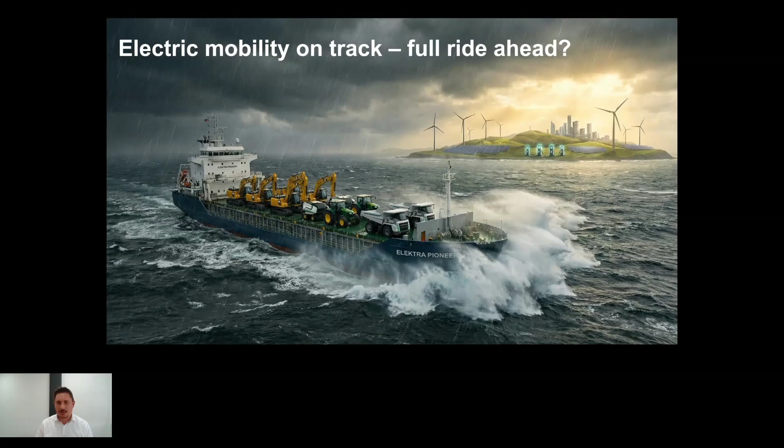So I think today we are already, and this is not only hope, I'm an optimistic guy, and pretty sure many will share that view, climbing the slope of enlightenment towards the so-called plateau of productivity, where it is not about electrifying everything for its own sake, but really doing that for hard reasons like total cost of ownership, like productivity of electric machines.

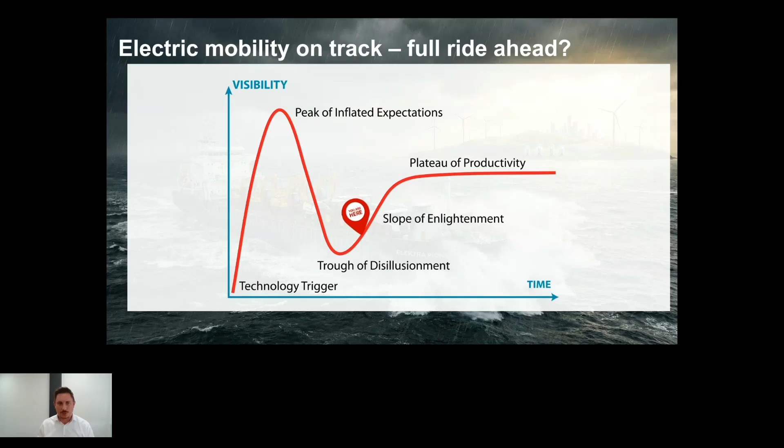And we're going to see throughout the presentation that there are use cases that actually cover these topics. So the question is, why did we need to go through that trough of disillusionment? And I have six quite simple answers just to make the ground for the further discussion. The first one is, of course, systems complexity.

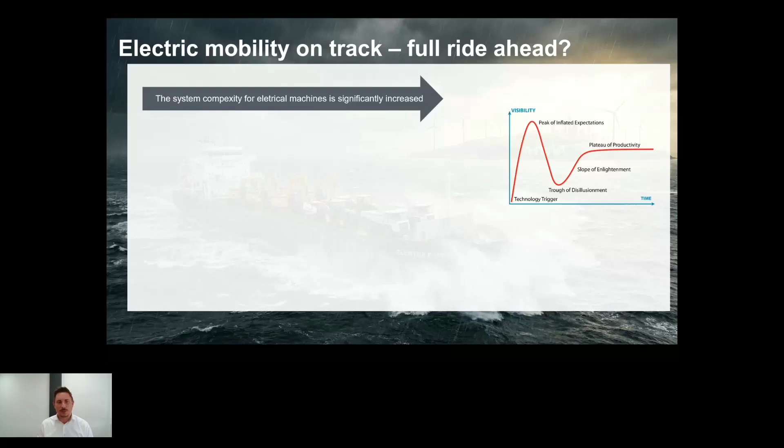The system complexity for electrical machines is increased, both compared to conventional machines, but also compared, for example, to electrical passenger cars. So there is more complexity in electrifying an excavator, a wheel loader, a tractor, than in having a conventional vehicle. Then, of course, we're talking about quantities. The quantities are way smaller than we have today in other segments. And this also goes along with cost, of course. It's all about economy of scales in the end.

If there are not that many quantities and the components are a bit more expensive or still way more expensive, then it all adds up with complexity and more expensive machines. So when we're talking today's projects, we often talk about cost parity as a target for the next generation of development of electrical machines. But when you look into electrical machines that are in the market today, you still often have factors of 1 point something to even up to 3 times the cost of a conventional machine.

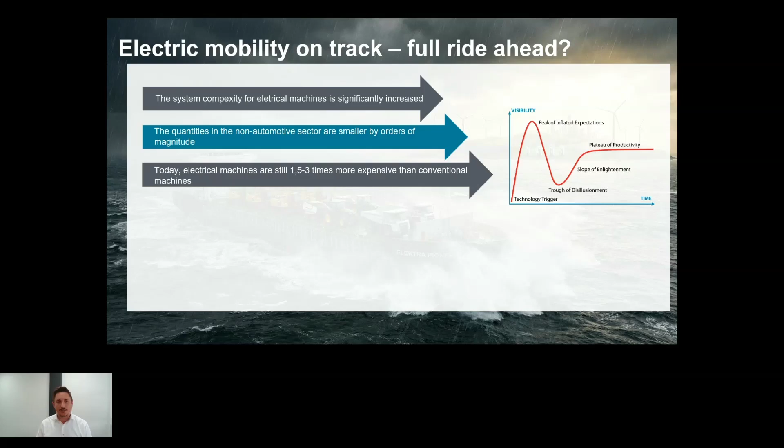This, of course, is not a long-term stable way, and we have to find out how to accelerate the economy of scales in order to get out of that dilemma of low quantity, high cost solutions. Then, of course, electrification in off-highway is not about emotion or being green. Typically, off-highway machines are bought because they are production machines. So it's about productivity, total cost of ownership, and there has to be a business case behind.

And of course, one solution to solving that dilemma would be a starting help with incentives and funding opportunities. This is just simply not there, and it hasn't really been around in most parts of the world over the last 2 or 3 years. And last but not least, nobody wants to hear that argument about the passenger cars, that the infrastructure is not working. I think many of you are driving electric cars and will agree that electric charging works perfectly for passenger cars, but the situation is a bit more complex, of course, when it comes to electric vehicles. But nevertheless, these are reasons why we have gone through that trough of disillusionment.

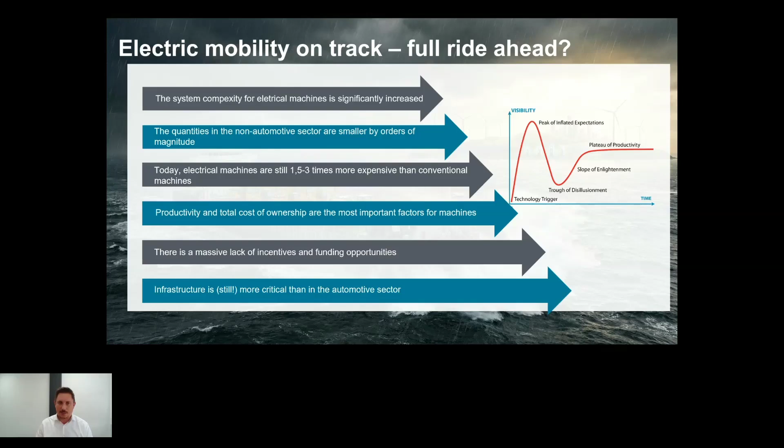But I said I'm an optimistic guy, and I have some good news, and I think many will share that the electrification is coming. When you see these kinds of applications, like really, really large machines being electrified, mostly for total cost of ownership reasons, partly, of course, also because of ESG targets, there are big deals, a lot of money in electrifying these machines. So there is no real physical barrier in doing so. It's just a matter of the business case. And if the big ones are getting electrified, then everything can be electrified.

But of course, it's not as easy going as I indicate here, there are some challenges to that. And of course, part of the challenge is speed and it is cost, especially from a European perspective. I think we all agree that we need to be faster and we need to be more cost efficient in the long run to really be able to develop stable electric machine portfolios.

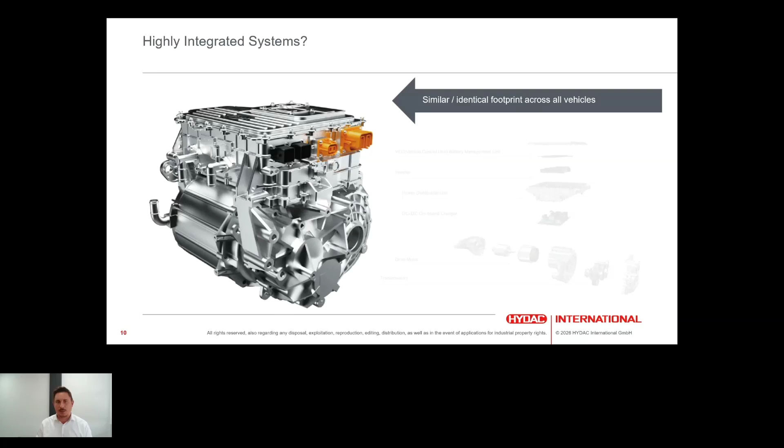So why not just do the same for the off-highway segment? Well, there are some reasons why this works fairly well. The first one is most of the passenger cars have a quite similar footprint or space claim for these kinds of components. So from outside, of course, they look different, they differentiate, but under the hood, there are very similar architectures, and they all share the same goal. They want to optimize their consumption according to the WLTP cycle.

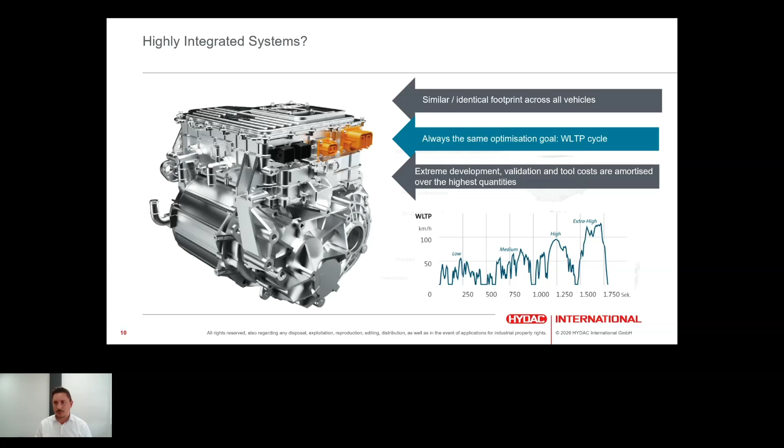So this is quite a clear optimization goal, and this allows for a lot of effort put into engineering development, validation, and of course there are also tool costs related to such high integration. So this must somehow bring a return on investment, and this is usually done via quantities. Now let's have a look at our market. Typical fields of application in the off-highway market: starting with pleasure boats and work boats on the one hand, going via agricultural machines, construction machines, special machines like GSE machines, but also sometimes semi-stationary machines and things like that.

And all of these applications, of course, have different mission profiles. They have different space requirements, different environmental requirements, different power requirements, and in the end, none of these applications alone have really high quantities. So that highly integrated, high quantity solution might not really work, especially in an industry that is well used to having highly customized powertrain systems, as everybody who has been working in hydraulics knows pretty well. There is a lot of customization in these kinds of applications. So, of course, skipping customization would be part of the solution, but maybe there is also a better solution. And one answer to that might be modularity.

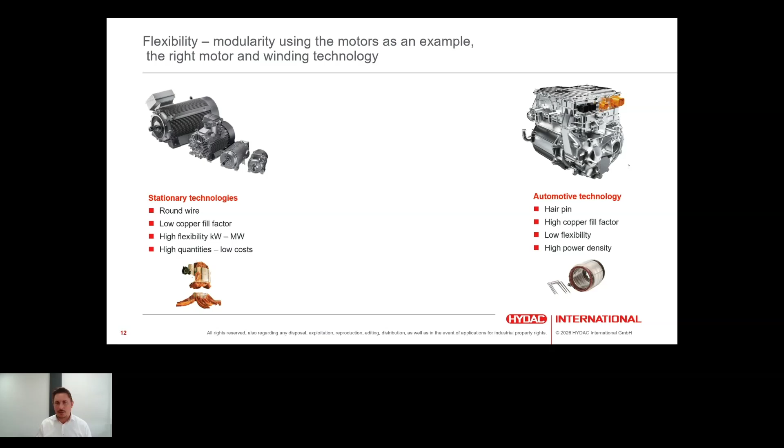And also this can be produced in high quantities at a reasonable cost, actually. But as we all know, mobile application is something where power density, torque density is quite important. So what we are trying to do, and I think most of our competitors and everybody in the mobile world also is trying to sit somewhere in between, combine the best of both worlds, and try to find high power density motors based on flexible technologies. In this case, round wire technology, of course, as most of the guys do, and still achieve by special winding systems a high power density.

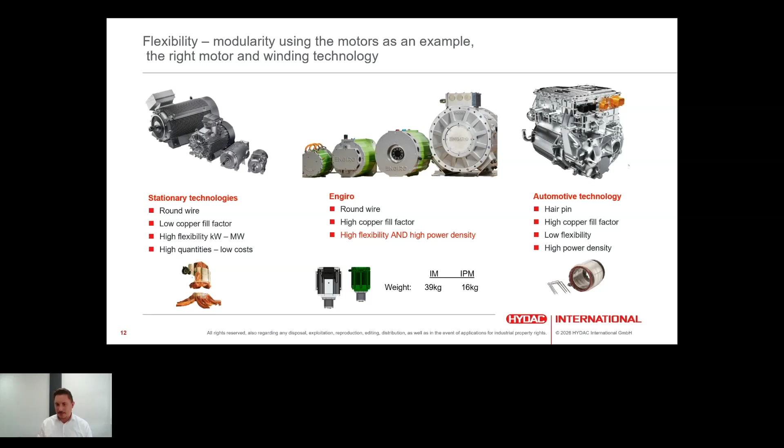And yes, power density is key. We cannot sacrifice all the flexibility to power density. And that's where modularity comes into play. Just to give an idea on how that works, typically modularity means you have some standardized technological core. This is the part that you don't want to vary from project to project, because there is a lot of effort put into that. There is tooling related to that. There is a lot of simulation, validation related to that.

So everybody coming out of the hydraulic space knows it, for example, as a pump, where you have the rotation group of the pump. For motors, it's quite similar. It's the rotor and the stator. Once developed, you do not want to change it from project to project. But application variance does not necessarily come from the electric core part of the motor, but rather from interfaces, from cooling, from having different set points in terms of voltage and speed. And this usually can be controlled by varying the length of the motor, varying the windings of the motor, varying the cooling jacket of the motor.

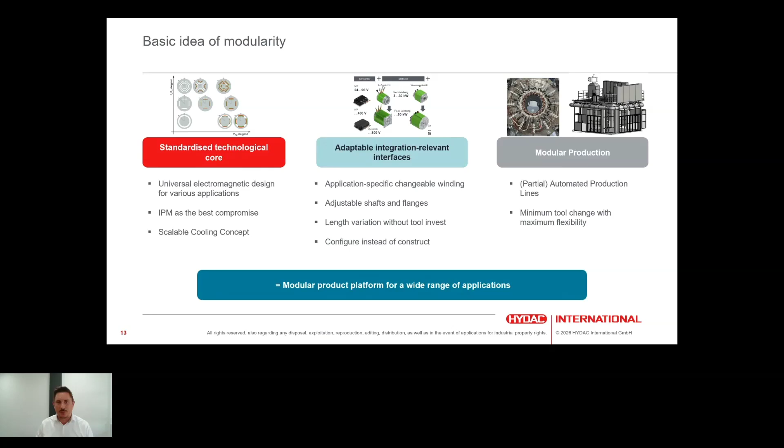So this is where modularity comes into play. And of course, in the end, you also need a production that supports that kind of modularity. But if you bring those things together, you end up with a very modular portfolio. I do not want to go into the details, as this is not a product presentation, just to give you an idea of what is possible with that kind of modularity.

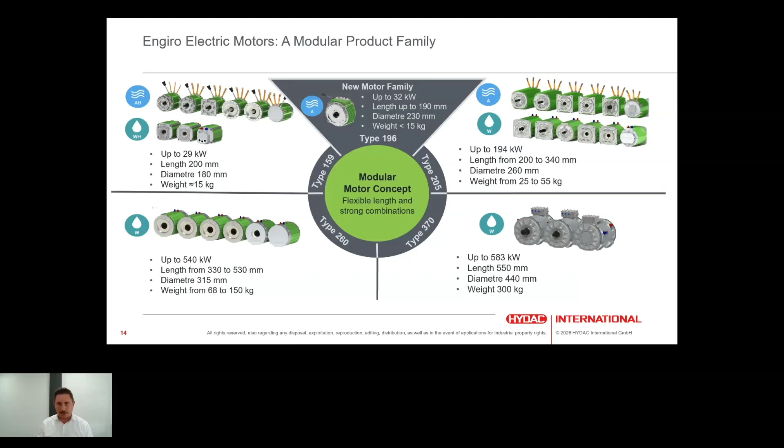So typically, out of 5 different frame sizes, 2 cooling principles, you can cover in every frame size 4 voltage classes. So, for example, let's take a 30 kilowatt motor, because it makes sense in every voltage class. You can have that in 48 volt, which is kind of a boundary case. You can have it in 96 volts. You can have it in 400 volt, in 800 volt. The same motor, same technological core once developed, but varied throughout different applications.

And of course, with a lot of projects come a lot of mechanical interfaces, which ends up with just having a small variance in the core, but in the end, more than 160 different application-driven product types. So part numbers, whatever you want to call it, different types of motors in the game. And of course, this is only motors. You can do that for every other component that you find in the electrification space or in the off-highway space in general.

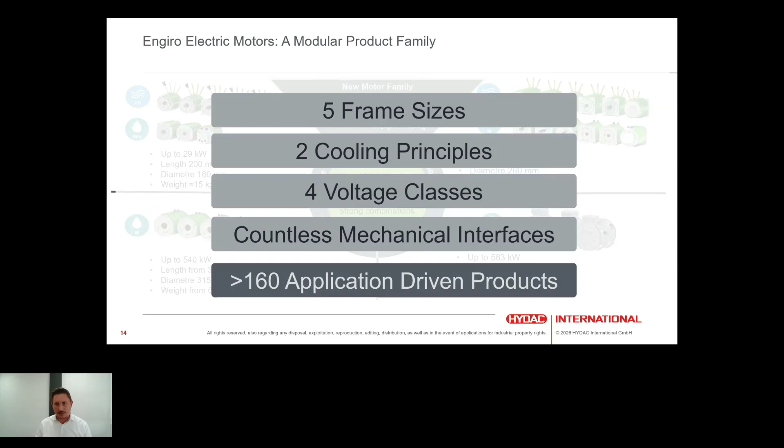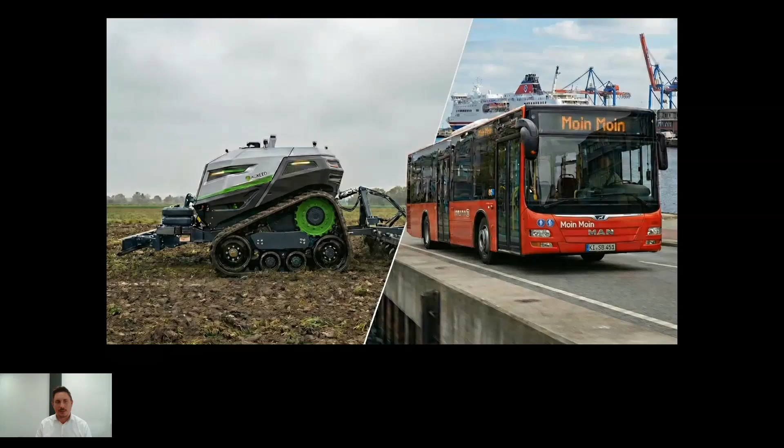And why does modularity help? Not only on complexity, but also on being fast. I will give you an example of that with the next slide. So these are 2 applications that are as different as they can be, probably. One, a clear off-highway application. On the left-hand side, this is a so-called AgBot. This is an autonomous farm robot, tractor size, so roughly in the 200 kilowatt class. And this is all about autonomy and productivity.

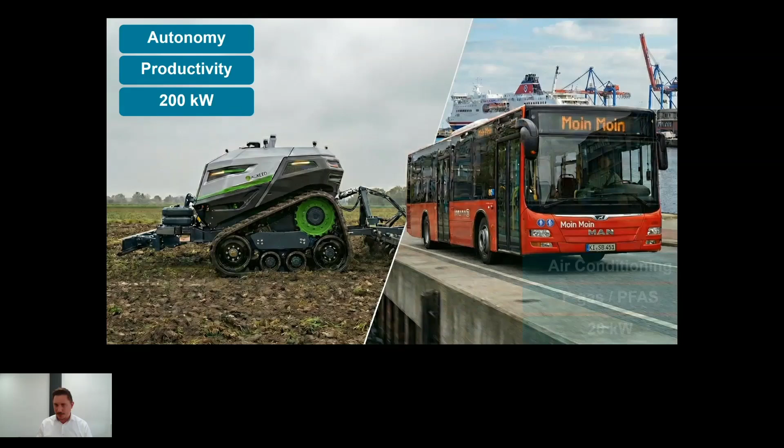So this is a diesel electric vehicle. It's not about zero emission, but it is about, as I said, autonomy and productivity, where electrification really helps. I do not want to dig into that in detail, just to show what this machine stands for. Well, and on the right-hand side, this is just a simple bus at first sight, but the bus comes with, let's say, a new problem to solve, because there are some new regulations upcoming in the EU.

It's not that easy to use the bus air conditioning anymore, because with that new regulation, you often don't find the right AC systems in conventional applications. So what you can do, and this has been our solution to that, is to replace the conventional compressor by a high voltage generator, generate a high voltage system for a conventional diesel bus, and by doing so, supply a high voltage propane air conditioning system.

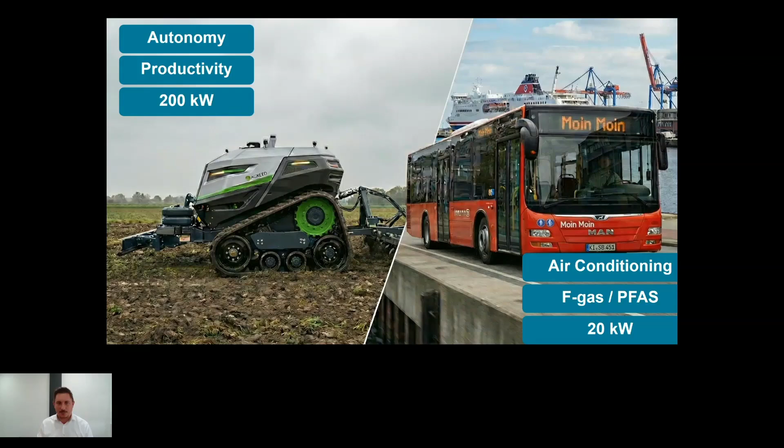So this is a retrofit option to get along with that new regulation. And this is done by using a diesel electric system. And this is the similarity actually of the two applications, because both of them are diesel electric, and both of them come with very special challenges.

Diesel electric without a battery. Without a battery means that you have, from a control theory point of view, a very stiff DC link. And that means you need, on the one hand, high dynamic voltage control from a generator point of view, but you also need to stabilize the DC link, because if you do not do so, with every load change, the inverter will probably see an over voltage or an under voltage error, and the system just stops.

This is the contrary of productivity on the left-hand side, but also when you think about an air condition. And for those who know Deutsche Bahn, this is a Deutsche Bahn bus. Deutsche Bahn has been very famous on their trains for non-working air conditions. Of course, we want to avoid this. So this means you need to have that DC link stabilization and good voltage control.

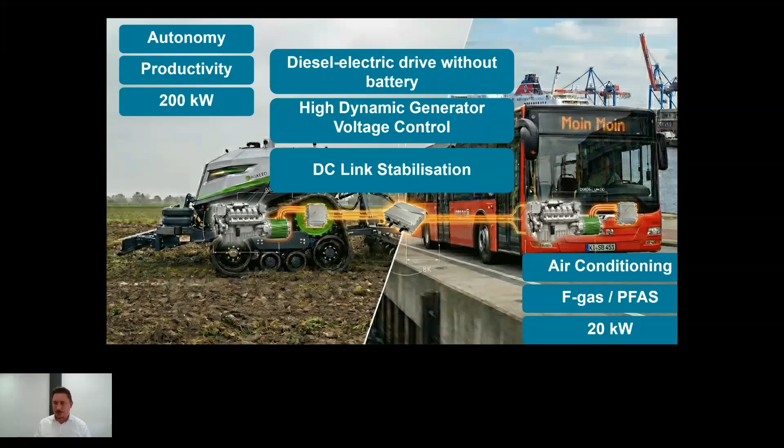And once you have application experience in modular products on the left-hand side, you can just do a carryover to the right-hand side and be fast in projects. This is the baseline of what I wanted to share with that example. So what does such a system typically look like in reality? It's not as compact as you have seen it on the machine, because here it is a lab example.

Let me explain the architecture. So you see here, in the end, an electric system for driving a rotating shaft. So quite a simple system, but there are some things you need to do for that. The rotating shaft is, of course, part of the motor. You need an inverter to do that. You have a battery in this case. Everything is high voltage, so it's liquid cooled.

You have a power distribution unit with all the fuses and contactors. You have an onboard charger charging the battery, and you have some HMI and some machine control ECU. And the reason why this is mounted on such a wooden table, I will show in a second.

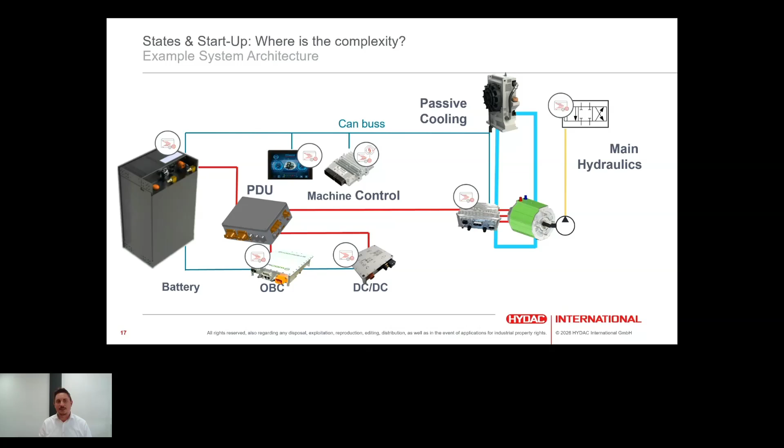So I've been talking about being fast, and I've been talking about one problem being complexity when it comes fast. So this should be quite a simple system, right? Looking at the system's architecture, this block diagram looks quite manageable. But this is a part that is often underestimated, because especially when something like that is done for the very first time, every major component in the system has its own so-called states.

So it's not just simple on-off, battery on, battery off, but there are some software-based states for the battery, like at least drive and charge. But everybody who is working in development of such systems knows that there are some more states. And the same is, of course, true for the onboard charger. And you see it's not the same states as the battery states. And the same is true for the inverter, and even the DC-DC converter has different states.

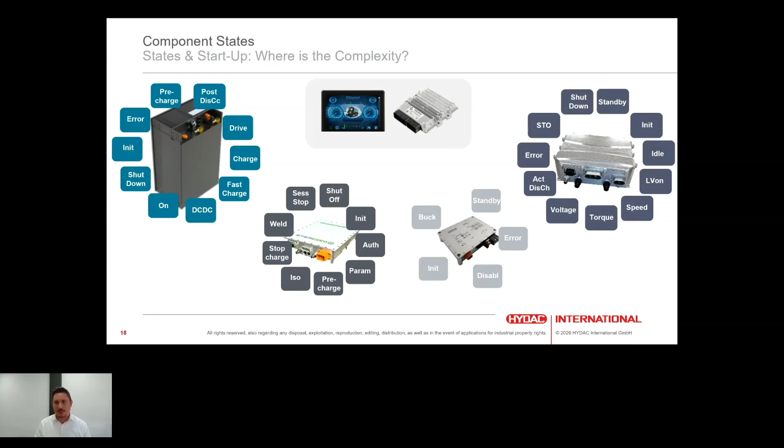And of course, the states are not standardized. There are some approaches to standardization, but let's be honest, nobody is really implementing standards 100% in every detail. So there is always something that is non-standard. And if you look into the components, these states are, of course, all interconnected to each other.

So there is a so-called state machine with transition conditions, and the component is moving from one state to another state when it gets the right message, in most of the cases it's CAN, at the right time to switch transition. And you see that even for a simple thing like an inverter, there is quite a number of states, and just remember all the other components.

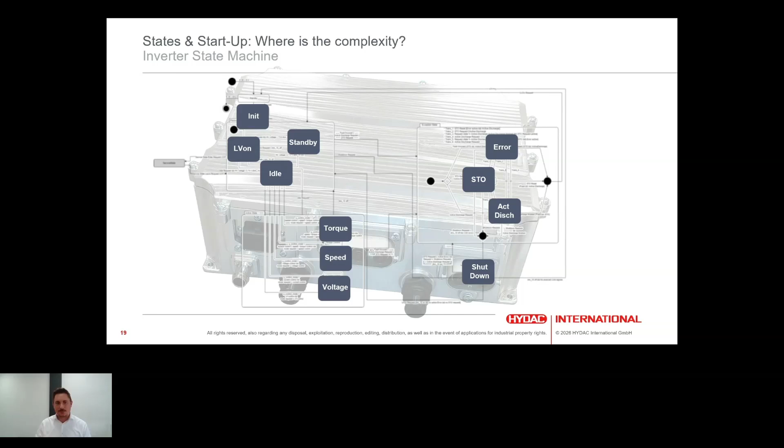Number of states, non-standardized, everything needs to be triggered at the right time to work with each other. And if it's not triggered at the right time, then there is an error state. An error state means the machine is not moving. Non-availability, this is the contrary of productivity. This is the contrary of good user experience. So there is a lot of potential for doing things wrong in this place.

And of course, also on machine level, there are kind of states or sequences that you have to go through. Just to give a simple example: this is, let's call it, a boot sequence from starting the key switch over to working. Working is just number 9 in all that sequence. And then there are again 6 different states for shutting down the system.

So this is not just a mechanical connection and a belt bringing everything together, and you activate the key switch, ignition is starting, and everything is done. More or less, let's say mechanically or highly integrated, but you have to really synchronize these states.

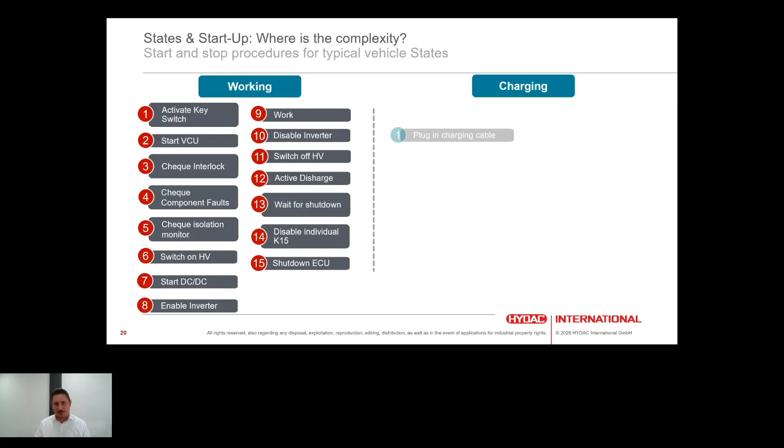When it comes to charging, just think of charging a conventional vehicle. Let's maybe do some oversimplification: just plugging a receptacle into that vehicle and refueling. In this case, it's even more of a sequence. And everybody who has been working in developing electric vehicles knows that charging, compatibility between different systems, between different chargers, batteries, off-board chargers, and so on, is often a pain point in development.

Of course, we managed to get that robust, but there is effort related to that. This is what this is all about. There is always effort related, a lot of effort, more effort than with a conventional vehicle. This brings in complexity, and this brings in cost, and that hinders being fast.

So just a brief example of how this looks when everything works. The sequence is going quite well. Interlock is checked, isolation monitoring is checked, battery is there. So now you're going through all the states we have seen on the architecture slide. Everything is up and running. In the end, the shaft is turning. As simple as that. It's just about the turning shaft. So a lot of effort, a lot of things that, of course, can be automated or standardized, but it's work that has to be done.

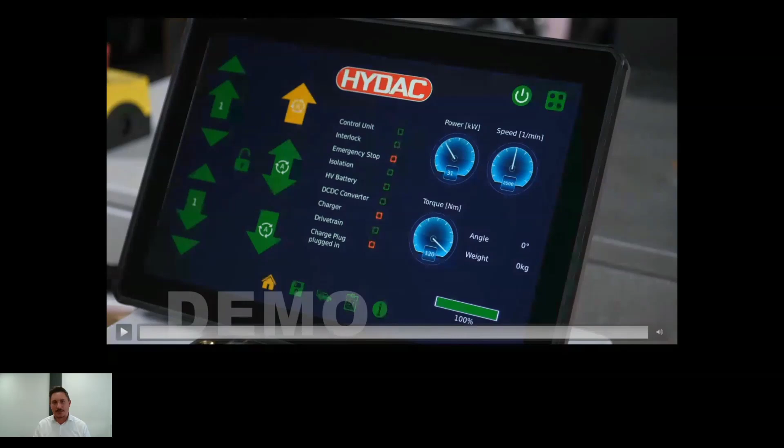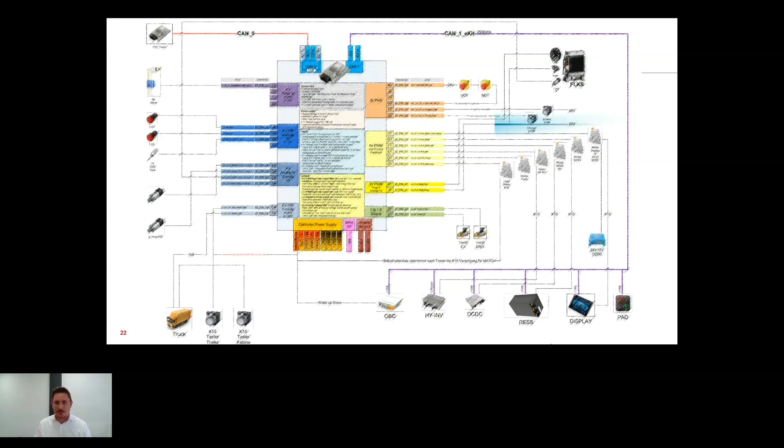And again, just to get some point to that, I do not want to go into the detail of the single wire diagram, but some of the secret sauce, a very pragmatic way of controlling those kinds of boot sequences, startup sequences, is, for example, shown here. You have the high voltage components on the lower right part of that diagram, and you see there is a bunch of relays here, and we just use the relays to have some dedicated K15 control, which means we can more or less in hardware, just like mechanically, control the startup sequences of these components. This brings in some robustness, and this brings in real control over the system.

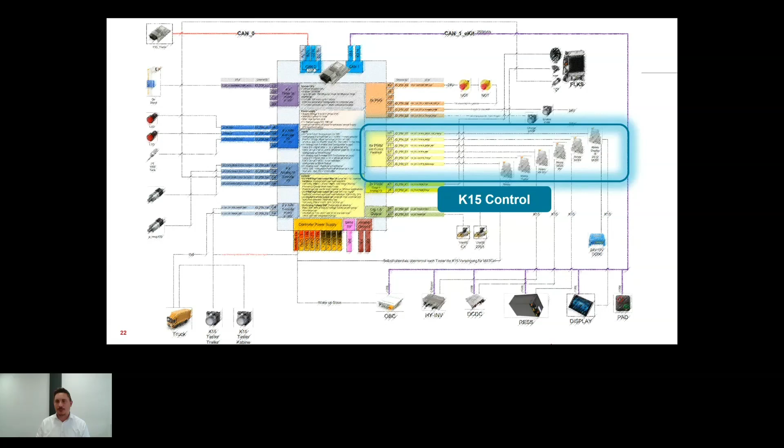And just to give an idea of the system, because this also is quite an interesting application with a quite interesting use case. In this case, again, we're talking about a kind of diesel electric system, but it's kind of separated into a diesel-driven truck with an electric trailer. So the question is, why should we have an electric trailer? It's quite a simple thing. It just needs to move up and down and carry dirt around. So why should we invest in an electric system? Well, let me just give a rough sketch of the use case or the business case behind it.

Typically these trailers are long-life machines. They actually survive three trucks during their service life. And every truck that wants to operate such a hydraulic trailer needs to go through expensive post-production to have the right hydraulic system. So this is often not done inline, but something that is done post-production. So this is quite expensive. This gives just a very rough estimate, about 40,000 euro added cost per trailer lifetime when you talk about 3 trucks. So this gives you the ballpark of what you can do in improving something.

And improving something in this case means adding an electro-hydraulic system for several reasons, but one of the reasons, for example, is productivity. Because the lowering of the trailer works much faster if you do not rely on a single hydraulics line that comes from the truck, but you have a dedicated hydraulic system under your control. And lowering faster, because you can imagine if the bucket is empty, lowering is just gravity lowering, which is pretty slow. But if you can somehow speed that up, this is an increase in productivity.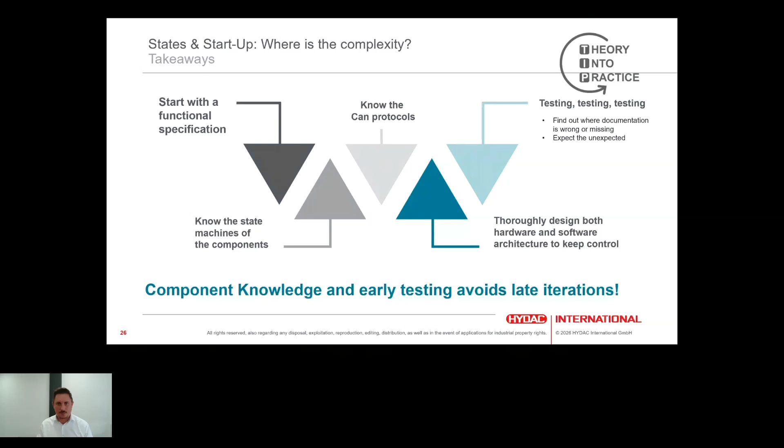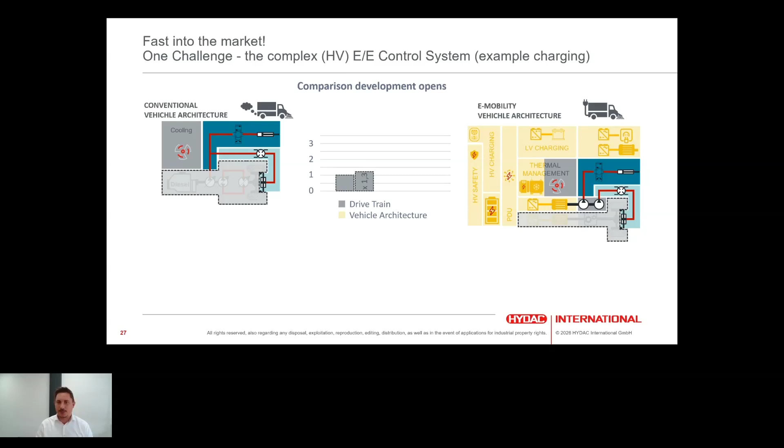that you have to put into creating a working, tested electric drivetrain. But just remember the picture with the diesel engine in the beginning, the high voltage or the electric architecture, which is also true for low voltage systems, is much more complex than the conventional diesel engine architecture. This typically results in an effort that is 3 to 4 times the integration effort you have for an electric machine compared to a conventional machine.

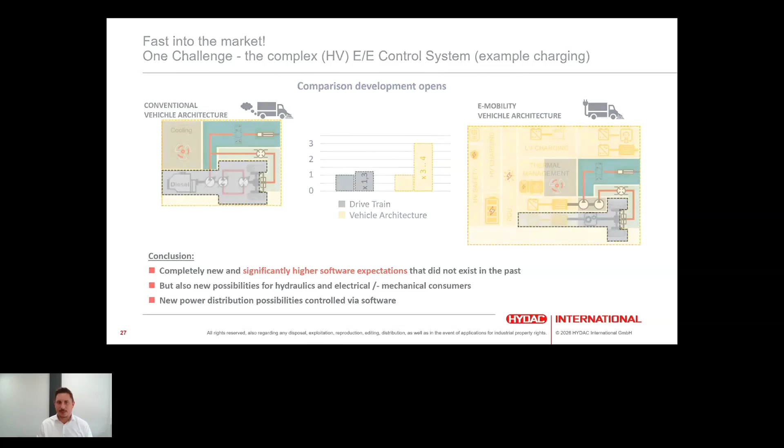So this brings us to the conclusion that we should start reusing stuff. We should not always start from scratch. And again, modularity could be one solution to that. This is what we are trying to do. We're trying to modularize software to decouple, for example, the communication and state machine based issues that are component bound from functional parts, like, for example, a ground drive or a thermal management system.

So the idea is to have different software layers with drivers, with functions, with overall vehicle management, and that you can really reuse those building blocks. In the best case, you can use the same charging software block that you have for a pleasure speedboat and for a wheel loader. This is then really reusability and modularity that helps us being fast and saving engineering costs.

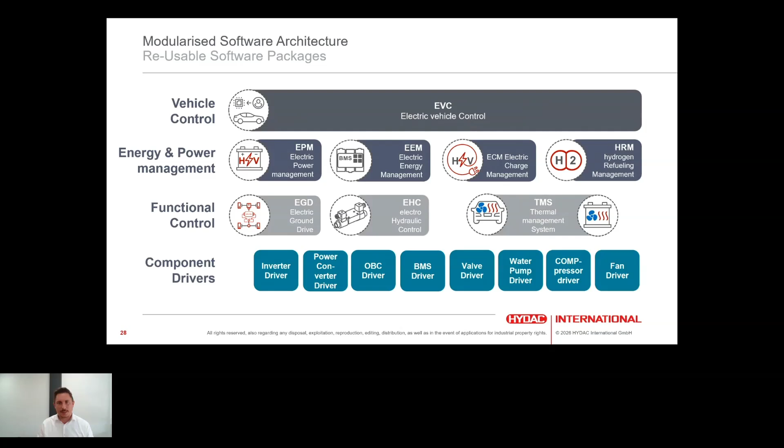But we've been talking about some struggles. It's not only about the protocols, but often there are some things not working in the first place. And most of them are not related to machine types. They are more or less related to the underlying systems architecture. The interesting thing is that when you look into, let's say, an oversimplified systems architecture for an electric system and compare those, many of those machines have quite similar systems architecture. So there are a lot of similarities. They share, so to say, the same architectural basis.

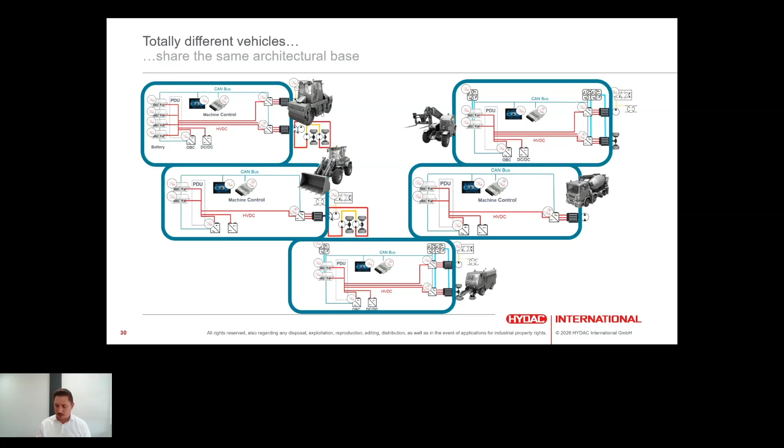When talking about battery electric, of course, it's always a battery, a charger, a DC-DC, a power distribution unit, a machine controller, an inverter, a motor, maybe more inverters, more motors. Sometimes it's one battery pack, sometimes it's 5 battery packs. It depends. But the underlying architecture is often quite similar. So this brings up the question, if we want to be fast, remember the picture in the beginning, complexity and speed, or cost and speed, isn't there a way through, of course, a well-designed system?

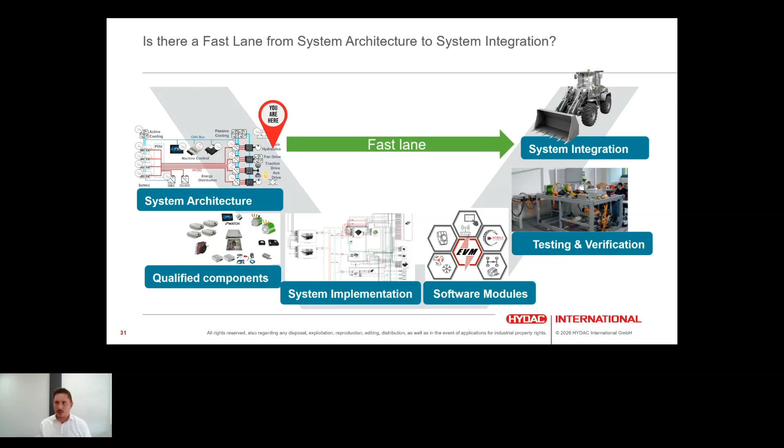Being fast cannot mean getting rid of or letting loose with quality design. So there are some stages you have to go through. You start on the left-hand side with your system design. Even if you have an idea, you have to go through implementation. And really important, as I said before, is verification, testing of the system. So the question is, isn't there something like a fast lane? And actually, I have mentioned the fast lane in the title of my presentation. Of course there is: when you have similar architectures, then reuse is again the keyword. So pre-validated systems that can be reused bring part of the fast lane.

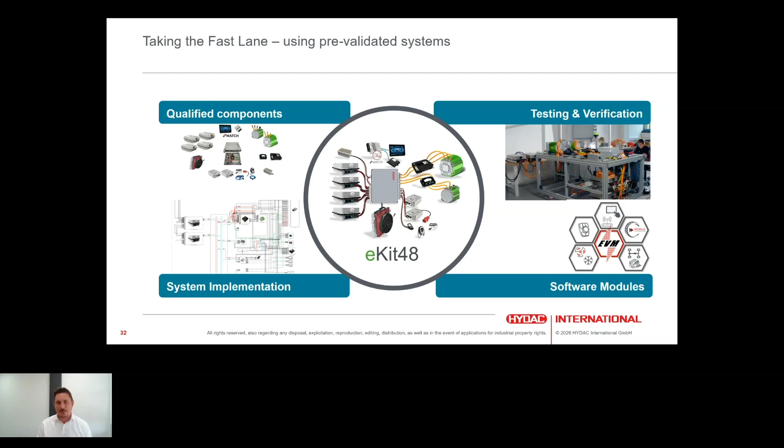So the idea is to have similar architectures with the same components that are tested working together, with the same software building blocks that are tested working together. Of course, this will never be a machine. This is always like an 80% solution, and you have to go the last 20% in a machine in application engineering. But it saves a significant amount of time in the development process if you just rely on a pre-validated architecture.

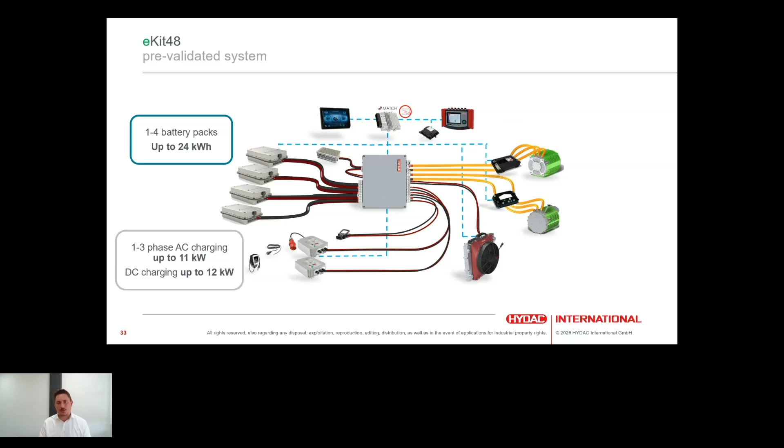And this is an example of such a system. This is, of course, again, modular, because we're not talking automotive. We always need some modularity. This is a 48-volt system. Therefore, we're talking about only up to 24 kilowatt hours. You have different charging options. Of course, you could have more, but this is what turns out to make sense in many applications in the market. You can have several kinds and numbers of electric drives.

And of course, what glues everything together in the end is the software, the ECU, the control system with integrated power management, error management. So all the things that need to be developed step by step when you start from scratch. This is the idea of a pre-validated system. And of course, a power distribution that from an electrical point of view brings everything together. And then there's some auxiliaries and so on.

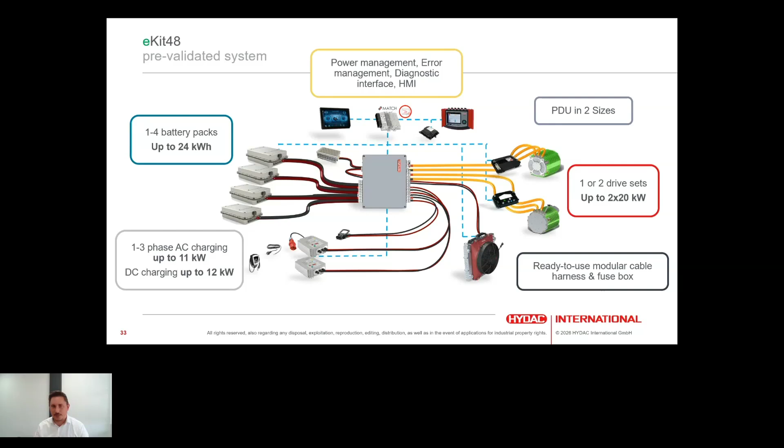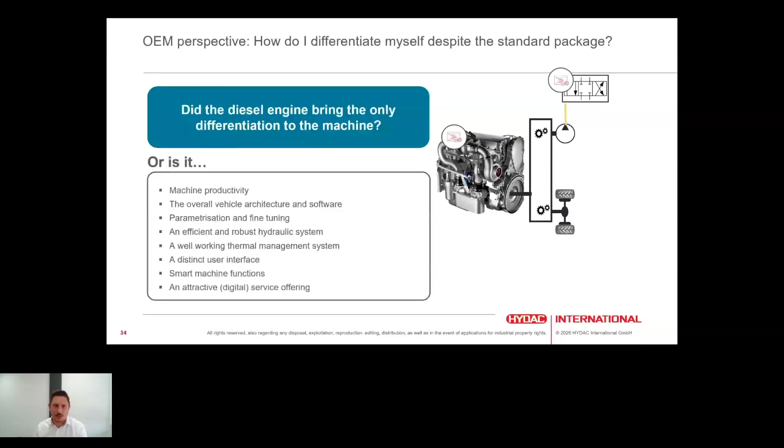So the question then would be, if everybody uses a pre-validated solution, what is the difference between the machines? If everybody uses the same drivetrain, is every machine the same? Well, that question could be answered quite easily when looking to the past, to the diesel engine ages. Of course, the diesel engine did not bring the differentiation to the machine. What brings differentiation is the productivity of the machine, the overall vehicle software, the way the machine feels, the popometer, as we say in German, the robustness of the machine, but also the user interface. And in the end, it's the service offering that an OEM brings to their end customers.

So it's not a rotating shaft that brings differentiation to the machine. A rotating shaft is just a necessary condition. Therefore, it is something that can be reused. So let's standardize what does not create differentiation and invest engineering time where it truly does. That's the idea behind reusing.

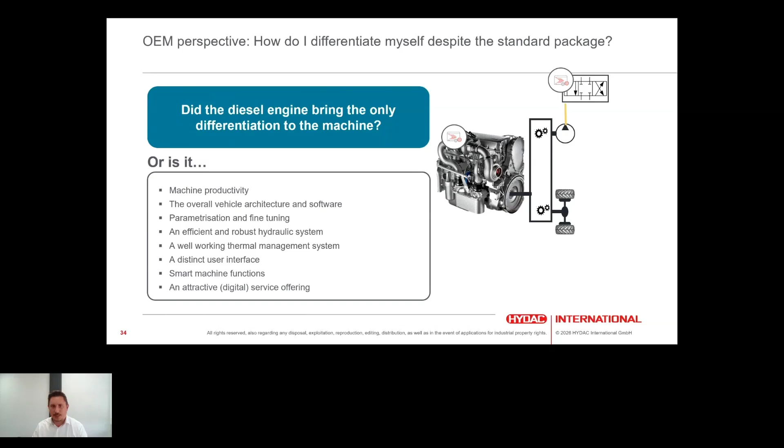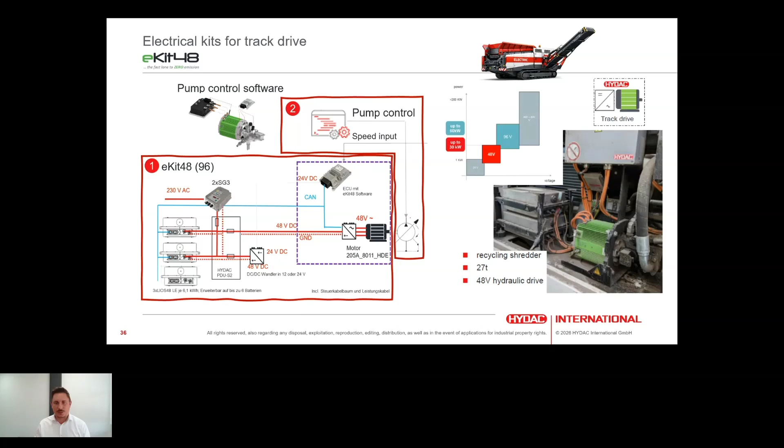And you can even have applications that you maybe do not think of in the first place when you think about 48-volt systems, like, for example, such a recycling shredder, which is typically a grid-based machine, but needs to move from A to B from time to time. This could also be handled by such a pre-validated system. So you do not need a small diesel or gasoline engine, but you can do this in a zero-emission electric way. And this often opens doors for some of the fundings and things like that. So there are, again, interesting use cases for these kinds of systems.

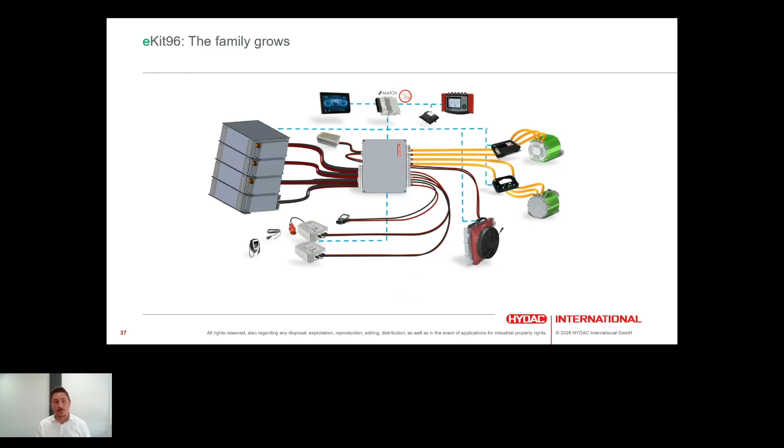And of course, the world does not end with 48 volts, so you can do basically the same thing in 96 volt. This is quite attractive because the architecture and the underlying components are often very similar. Of course, you need a different battery. In this case, we use an LFP battery, but you can scale up, for example, the peak drive power up to 60 kilowatt. You rely on the same interfaces. You have to do some adaptations regarding electrical safety, because not every machine in the world can handle voltage between 60 and 120 volt as easily as a forklift can. But these are solvable problems, and you end up with systems and software architecture quite similar. And again, this is reusing.

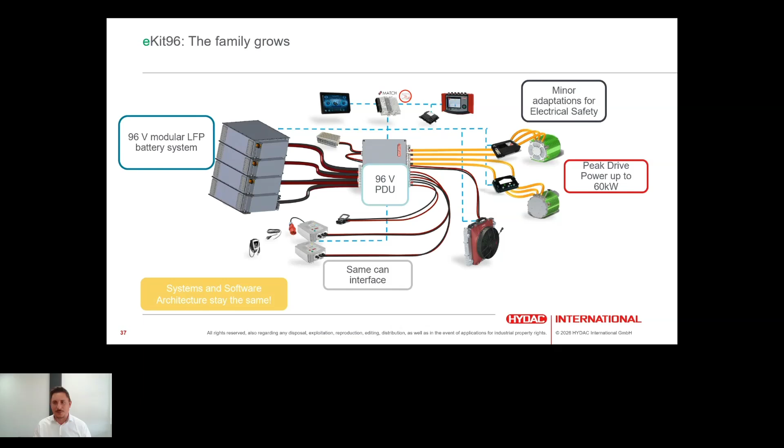So everything done, right? Let's have a look at some of the reality. The session is called From Hype to Reality. So the architecture stays the same, but the challenges clearly do not. Here we have an example of such a system. It's again a truck-mounted system where you have a battery-powered PTO kit for a truck, so hydraulic power out of the battery, like a start-stop system I mentioned before, but with higher power for 96 volt.

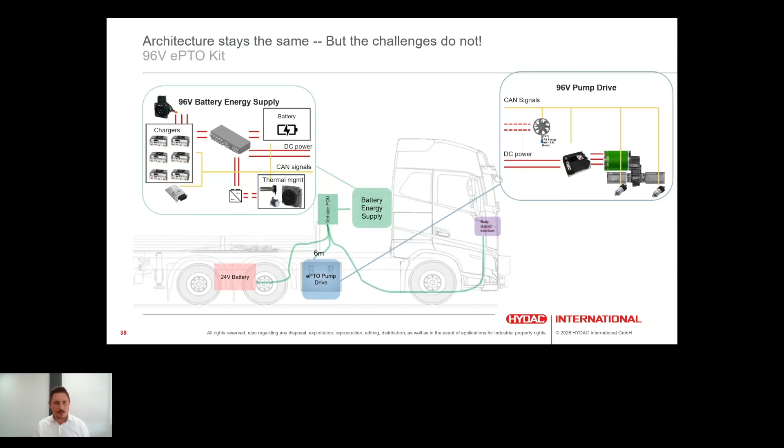And the challenge here, of course, is that the components are distributed across the vehicle, and that's often related to, let's say, EMC trouble. Let's have a look at the signals. This is a typical CAN signal scope recording, which looks quite okay. And now let's start the motor, and it looks like this. So this is something that is clearly not okay.

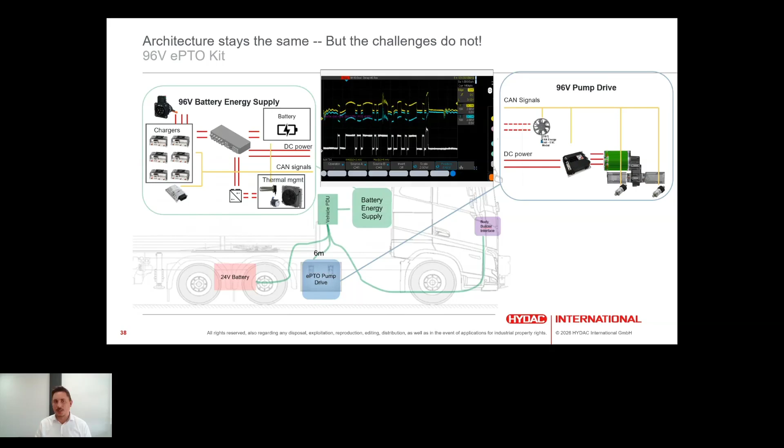This is violating standards, actually, that give limits to CAN levels, and it also ends up with error frames on the CAN system, not being stable anymore. Stable in the sense that there are errors that cause a switch-off of the system that needs a restart. So again, not robust, not available, not productive anymore. So not acceptable from a customer point of view.

The problem here, the error frames, there are, of course, some challenges coming out of the vehicle, like, for example, you have long cables, and something that may not be underestimated is 96 volts is not 48 volts. So there is an increased voltage change rate. It's double the voltage change rate. This, of course, has an impact on EMC, on what's going on with currents, also on the ground and PE and so on.

And what didn't help in this case is, of course, the first idea is this EMC stuff comes from switching. Switching is in the inverter, so just replace the inverter and everything will be fine. Of course, that did not work because it's a system-related topic. A lot of simple measures that everybody knows from the textbook didn't really help in this context. So what helped in the end is going back to a well-designed wiring topology, doing filtering where it makes sense, and having the correct CAN references in the end.

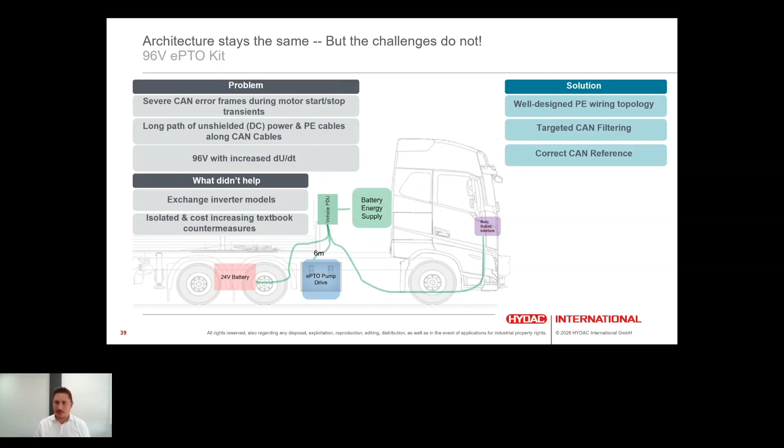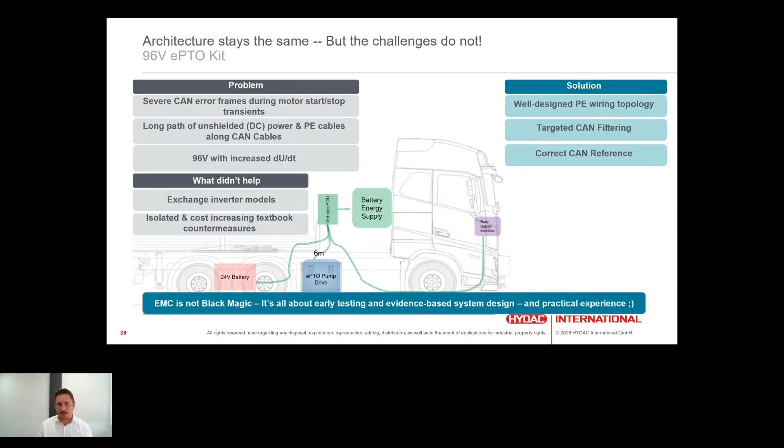So what this example shows is that EMC is not the often cited black magic. It's mostly about, again, early testing. I call it evidence-based system design. And of course, a lot of practical experience, which maybe comes close to black magic in the end. But this is something that is available. A lot of you have acquired experience. We have acquired experience. So these are solvable problems in order to scale electrification.

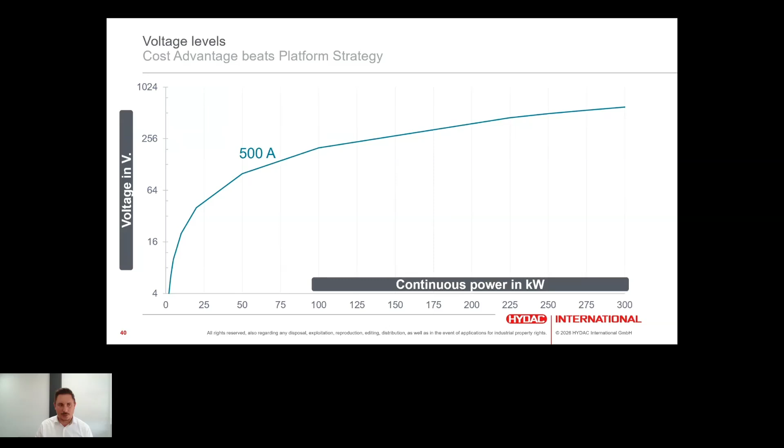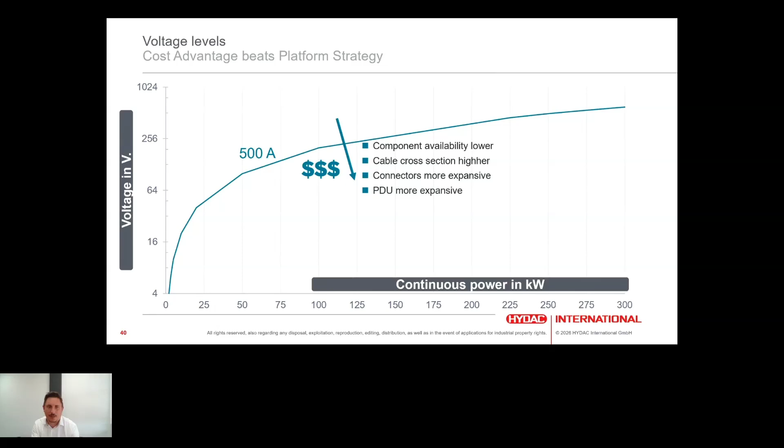Talking about voltage levels a bit, I want to keep that short because I think many of you have already discussed that or thought about that. This is, for example, a chart that shows voltage over continuous power. And the question is, when to use what? We have some rule of thumb for ourselves when we are asked how to design a system. That is, we do not want to cross that 500 amps line. Why? We're talking about continuous current. Component availability gets lower. Everything gets bigger. Everything gets more expensive. So this is something we're trying to cluster like this.

Below 20 kilowatts, it often makes sense to use 48 volts because it's extra low safety voltage. Everybody loves 48 volts. There is a space where 96 volts totally makes sense. Maybe that's a bit different to what people have been discussing over the last years. A few years ago, a lot of people were thinking 48 volts will be the small machines, and then you are going high voltage because of platform reasons.

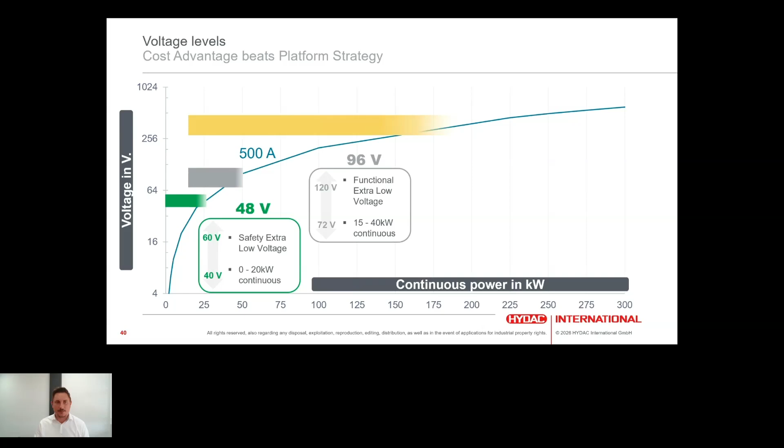But 96 volts still has a significant cost advantage, not only because of economies of scale, because it's coming out of the forklift market, at least the power electronics there, but also because it can be simpler. For example, MOSFET inverters do not necessarily need a liquid cooling system, so you can save system cost when going from high voltage to 96 volts in that segment. And of course, above that you are in the high voltage segment.

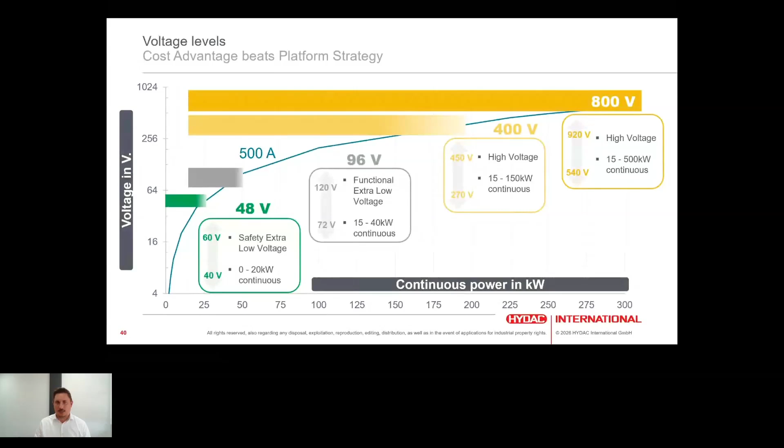So what about pre-validated solutions when it comes to high voltage? I wanted to put it like this. This is something that can be done, but the variance in high voltage applications is by far bigger than it is in low voltage applications. The variance in architectures: there are more diesel-electric things, there are grid-connected units. So from our point of view, it does make sense to create modules that are reusable, but not in all cases to create a pre-validated system solution that tries to cover a large portion of the market.

Of course, there are specialized solutions, pre-validated system solutions with partners. We're also working with those guys, and I guess many of you are also doing that. But we're trying to be, let's say, kind of agnostic in the high voltage space and just bring in some pre-validated modules that also work together with partner solutions, like, for example, partners that have high voltage batteries that we do not have, or partner solutions where generators and engines work together.

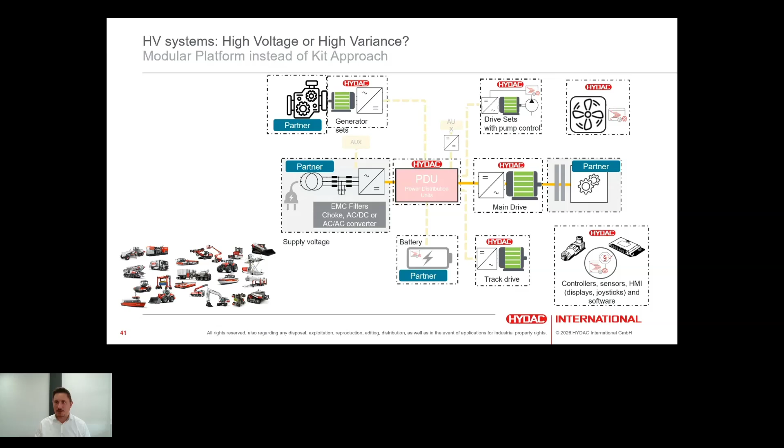So in this case, the baseline message is we need some kind of a platform logic where we have modules that work together with each other across company borders with some pre-validated characters. And this brings me to one of the messages I also want to bring in this presentation. When you look into the market, into that low volume, high variance market that we have now, I think the nice word coopetition, as a mix of competition and cooperation, is the new normal in that fragmented market that we are in.

Because nobody can scale that market alone. We need to somehow find ways to work together. We can start competing again when the market is there in like 5 years or whenever. Electrification is a no-brainer, but for the time being, I think a lot of us need to work together. And this is one of the answers to my initial question on how can we help scaling electric off-highway applications.

When thinking about how to overcome the hype and climb towards that plateau of productivity, then my answer, our contribution to that, will be modularity. It's modularity in products, in hardware. I showed the motors example, but also in software, like software modules, and in subsystems. Think about the high voltage space. Pre-validated subsystems can help being fast, can help time to market and saving efforts.

But of course, customization is something that is very deeply integrated in our market. So customization is something we need to allow for. It's not just highly integrated systems like automotive, but flexible, modular, pre-validated subsystems that help. And here we need to work together. And this brings me to the last point. Partnerships are something I think are very important to scale that market.